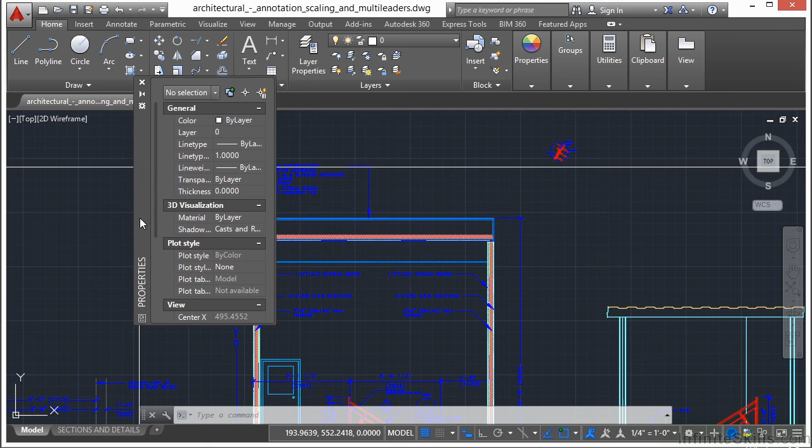And let's open up the Properties palette. Now it's real easy to do. Press down the Control key and the number 1 at the same time. Now a palette, if you left click on it on the top here and drag it around, you can reposition it. Once it's pulled out of the dock like that was, if you click on this bar, left click and hold, you can move it around. You can also stretch it so that it's taller or wider. Just depends on what you want it to do.

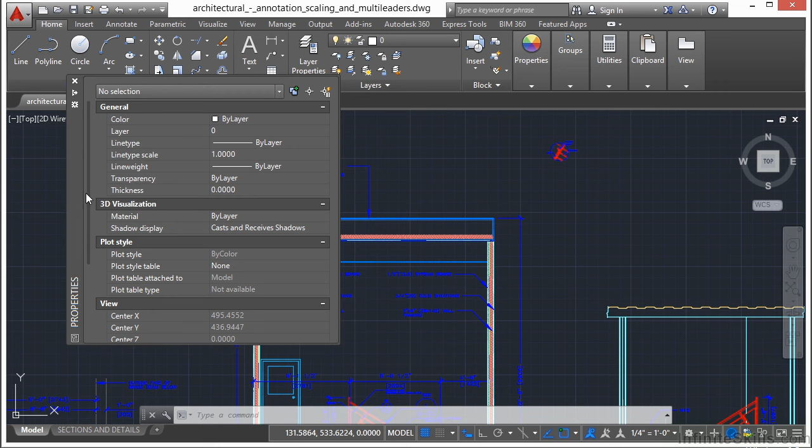If you click on this little button here, that'll auto hide it. And when you mouse over on it, it'll pop up. This little button here gives you different properties that will allow you to move it, to dock it left or right and anchor it, set up some transparency, etc. I typically leave it the way it is, and I typically leave it docked here on the left.

So right now I have nothing selected because it says no selection, so I know this. Plus I know that I haven't selected anything either. But when I pick something like this object here, it'll tell me what it is. It tells me it's a multileader object. And then it gives me general information. That tells me the color, the layer, the line type, etc.

Then after the general box, and you have a little scroll bar here you can left click on and drag up and down, goes the miscellaneous section. And that just gives you some overall scale items and some bit of information. And then it gets more specific. What I mean by more specific is that it has object specific information in it. Like for the leader and for the text. It tells you the context, it tells you the leader types, etc. If I scroll all the way down, I can get to even more information on my object.

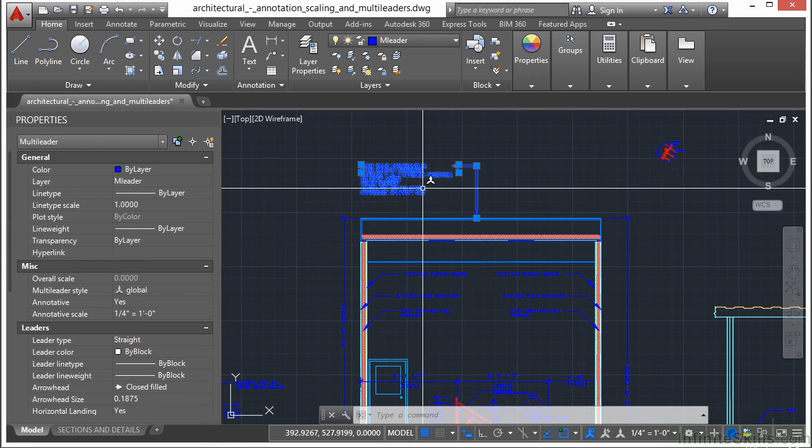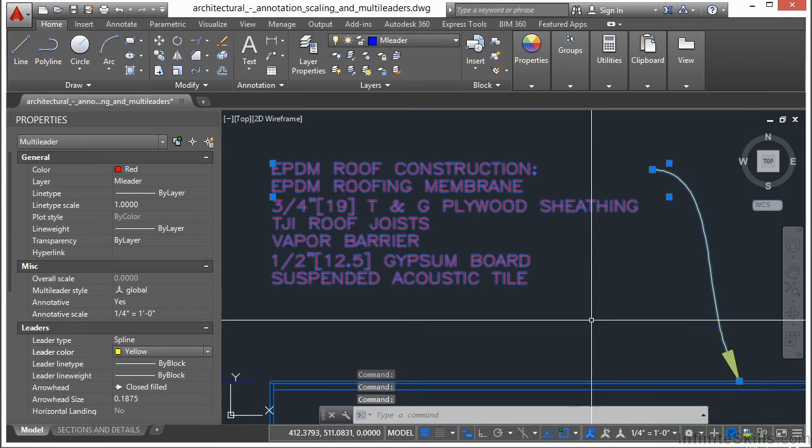Now the really cool thing about the Properties palette is that I can make changes to my selected objects. Right now I have this text selected and its color is set to ByLayer, but I can change it, as you can see here, to different colors just through the Properties palette. I can also change some of the other options on this. I can change that from a straight leader type to a spline. I can even change the color of the spline. And when I unselect it, I can't make the changes to it anymore, of course.

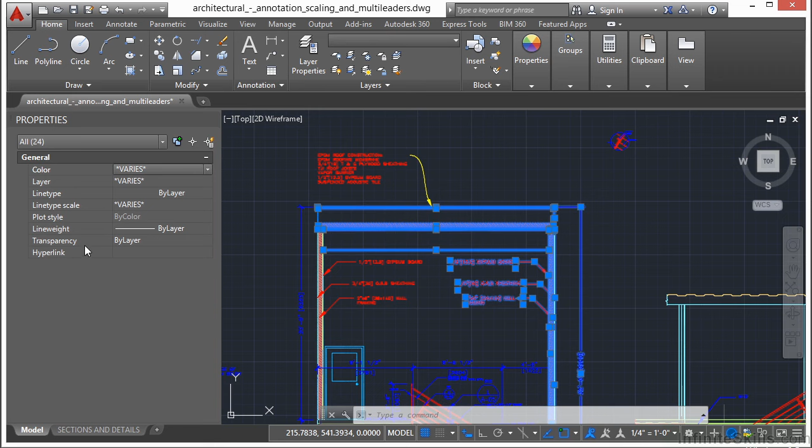And the other cool thing about the Properties palette is that if I select multiple objects, it will tell you how many objects and what type that you have selected. And I can make these changes to all of them all at the same time. Now, if you have multiple objects selected that are different types of objects, it will give you just a little bit of information on here, and it will only look at the types of information that they all share. And typically that's going to be what's in the general section. So I can change the color of everything all at the same time. I can change their layers, I can change their line type, or their line type scale.

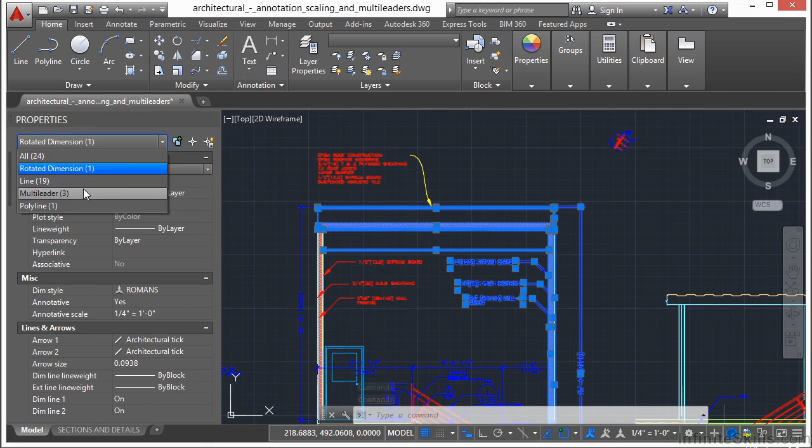Now, if I have everything selected and I want to look at a specific type of object, I can click on this arrow here and it will list how many different types of objects I have of those specific types of objects. So if I want to take a look at my rotated dimension that I have selected, I can. I select just that one option, and I make the changes to it. And only that one object type will be changed. I can go to my lines and I can change the colors of my lines right there, just like that.

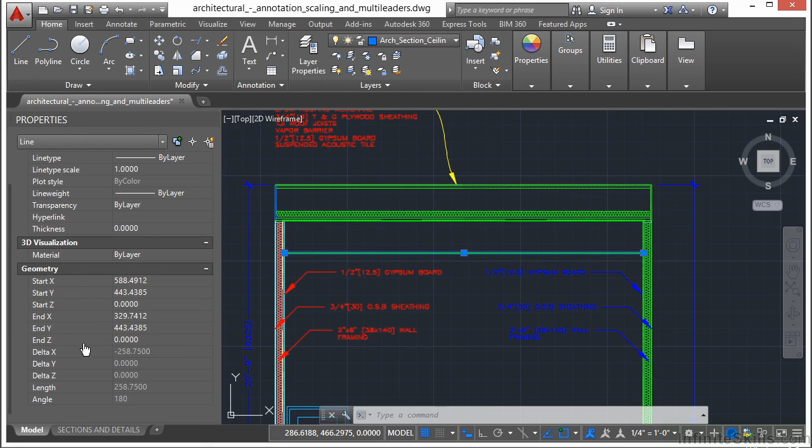So you can see you can make a lot of different changes to your objects through the Properties palette. I always leave this open all the time in my day-to-day working with AutoCAD because I can do so much with it so easily and so quickly, and it provides a lot of information to me. For example, if I select just this line, it tells me my general information. If I scroll down, it also gives me my length. It tells me what angle it's drawn at, and I can get the coordinates for my start and end points. If I have a closed object or a hatch pattern or a polyline, polygon, etc., it will also give me the area of that object.